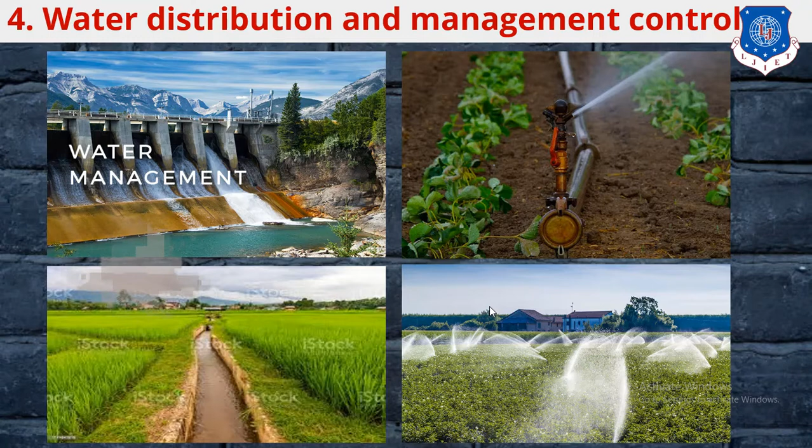Now, in this session, we have to discuss chapter number 4, that is water distribution and management and control. Okay, so in this chapter we have to discuss the content that is irrigation canal management. So that is the content that we have to study: irrigation canal management, then water distribution and management control.

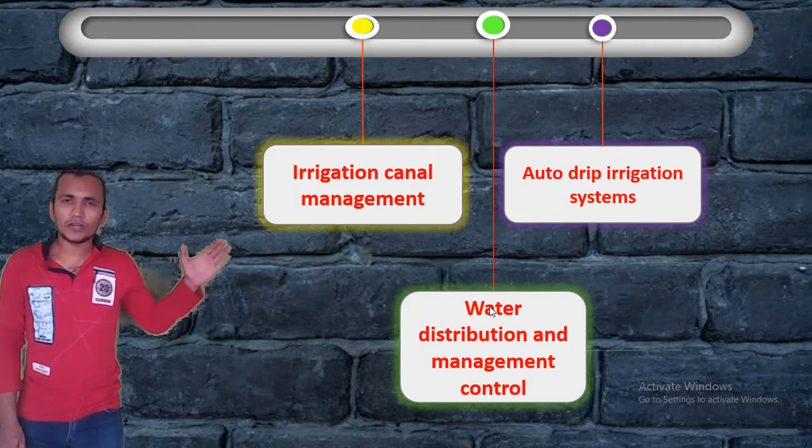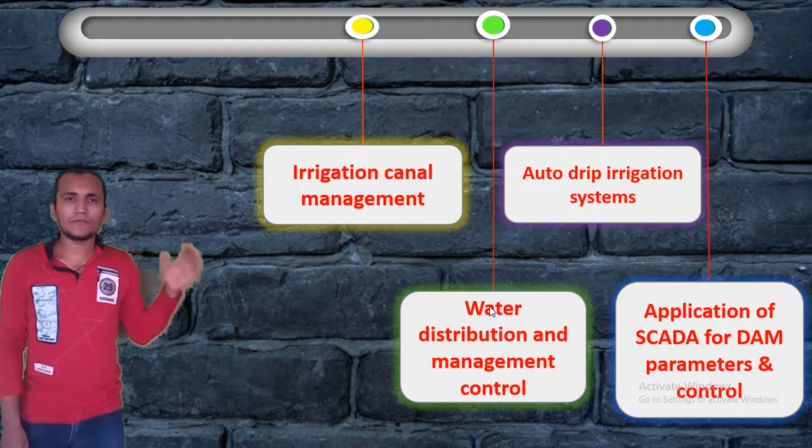Then we have to discuss the content that is auto drip irrigation system, and the last, that is application of SCADA for dam parameters and control. So that is the theory content that we have to study in this chapter. So let us start with the first topic of irrigation canal management.

So we know that the irrigation system means we have to supply the water to our crop or plant. So let us see the definition for irrigation system. The irrigation system is the system having a process of supplying the water to crop plants growing in the field by means of canal, reservoir, well, tube wells, etc.

So irrigation means we have to supply the water to the crop or plant. Then we can say that the water provides essential macro-nutrients to the crop, that is hydrogen and oxygen, that we already know is H2O. So that is the irrigation system. Then we can say that the irrigation system consists of the following.

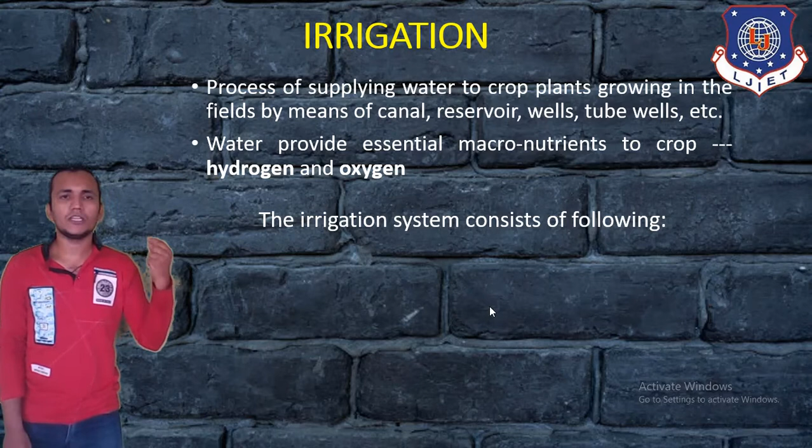Now we have to manage the irrigation system. That means we have to do water distribution management. So here we have to divide this irrigation system into different parts, and each part works as a management. So let us see the irrigation system having the following.

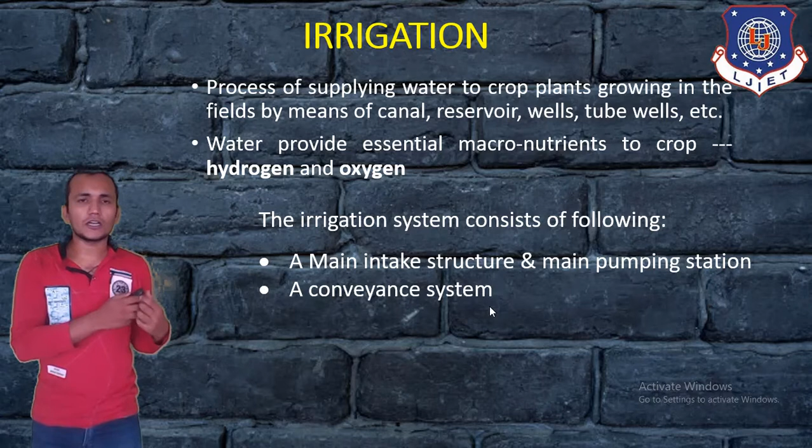First, that is a main intake structure and main pumping station. Then second, that is a conveyance system. That means we have to convey this water from the main tank to the distribution system. Then that is the distribution system. Then a field application system. A field application system means our crop or plant or our farm, that is a field where we require the water for irrigation purposes.

Then the last, that is a drainage system. So drainage means we have to drain the water, the excess of water that is not required by the plant or crop, that we have to drain back to our main intake structure. So those are the different parts of the irrigation system.

Here there are 5 different blocks. Okay, main intake structure and pumping station, then conveyance system, distribution system, field application system, and drainage system. So there are 5 blocks for the irrigation system. Now we have to discuss each block one by one.

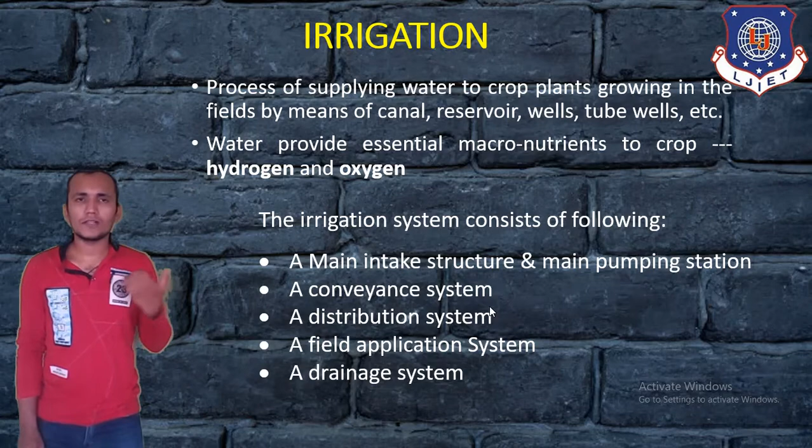Before we discuss this, first of all, you can see the picture of the irrigation system. So here you can see the main intake system. From this main intake system, that means a river or reservoir, we have to pump by using a motor or pump, like a centrifugal pump. By using the pumping station, it can be distributed or conveyed to the different conveying systems.

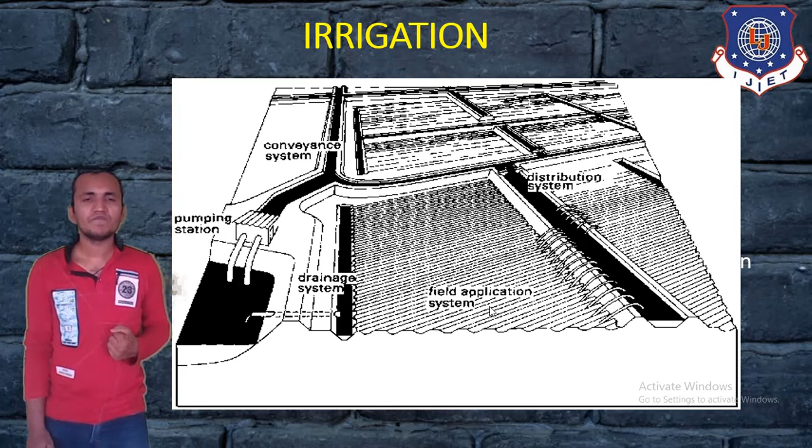Then by using this conveyance system, the water is distributed in different field application systems. So here you can see the field application system, and from the field application system, the remaining water, the excess of water, is drained back to our main intake system. Okay, so that is the main picture of the irrigation system that we will use to explain how irrigation management has been done. Now, the first block, that is the main intake structure.

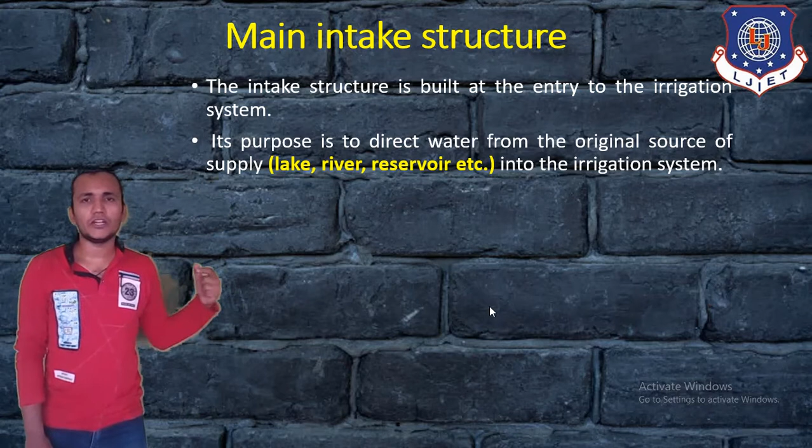So the main intake structure is built up at the entry to the irrigation system. Its purpose is to direct water from the original source of supply, like a lake, river, or reservoir, into the irrigation system. So that we already know. So if we see the picture for the main intake structure, then it looks like this.

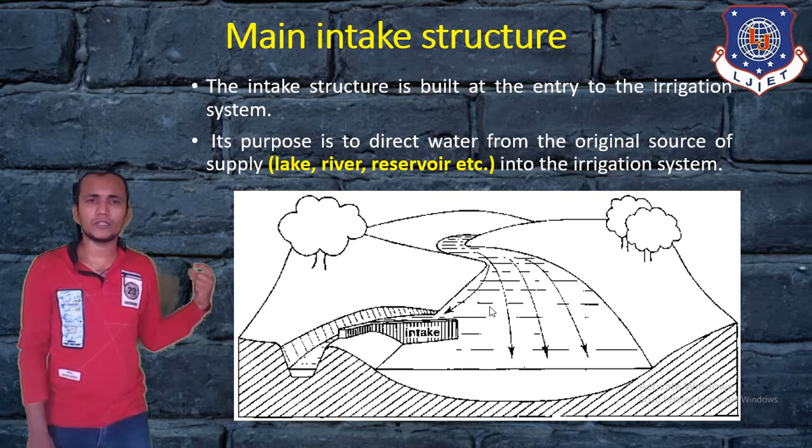You can see there is a river in a village. Okay, so from this river we can take water into a storage tank like a reservoir. Okay, so that is the main intake structure. Now the next, that is a pumping station.

Why is a pumping station required? In some cases the irrigation water source lies below the level of the irrigated field. Then a pump must be used to supply water to the irrigation system. We know that a pump or motor can supply water from a lower level to a higher level, so sometimes we can use a pumping station to supply water to different irrigation fields.

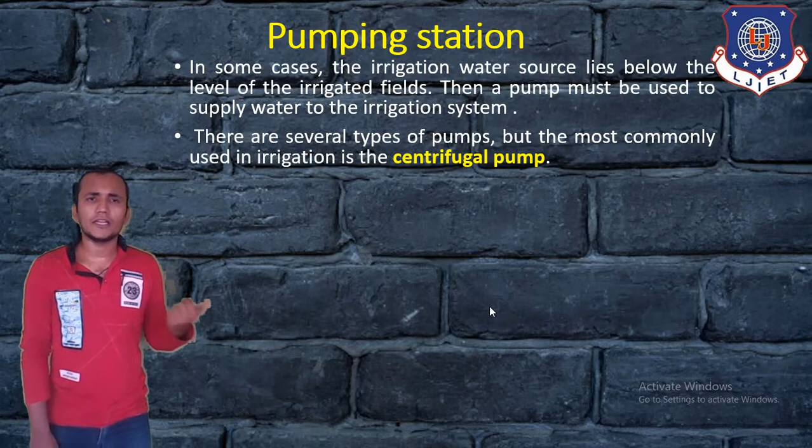There are several types of pumps, but the most commonly used in irrigation is the centrifugal pump.

Now let's see the picture for the pumping station. You can see one of the rivers in the village. Here, river water is collected using a pumping station and it will be distributed to the irrigation system. That is the picture for a pumping station.

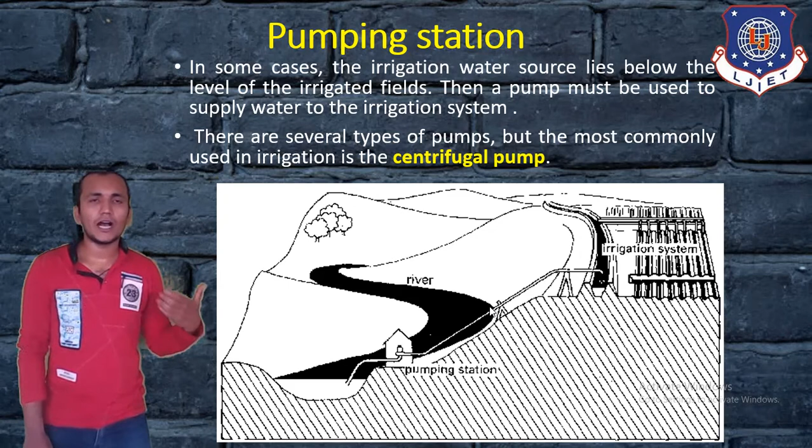We will try to explain this in a better way, so we can use different kinds of pictures to understand very well how it works.

Then there is the conveyance and distribution system. This is a main part of irrigation management, because we have to collect this water in a reservoir or river, then we have a pumping station. Now we have to distribute this water to different areas, different farms, or different field applications, so we have to manage it. That means we have to convey this water, distribute it, and also charge the farmers for the use of water.

That's why we also have measurement and control of water - how we can control the flow and measure the flow. That is a main important topic for irrigation management. So that is the conveyance and distribution system.

This system consists of canals transporting water through the irrigation system. Canal structures are required for control and measurement of water flow. In the conveyance and distribution system, we can use a canal system that we already know, to supply different farms or any irrigation field. We have to use a canal.

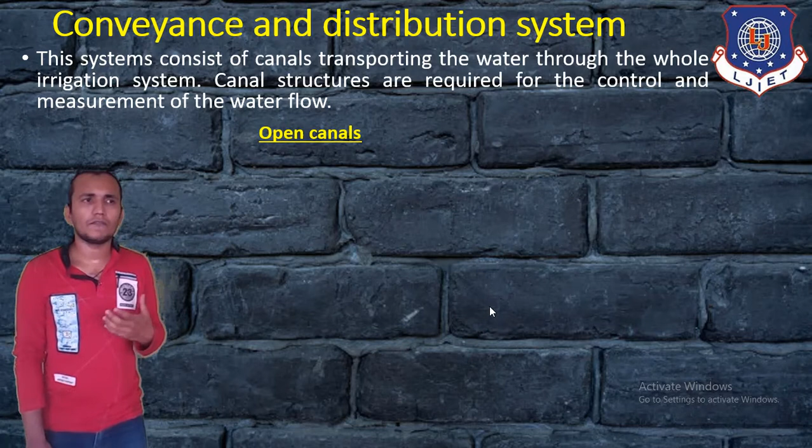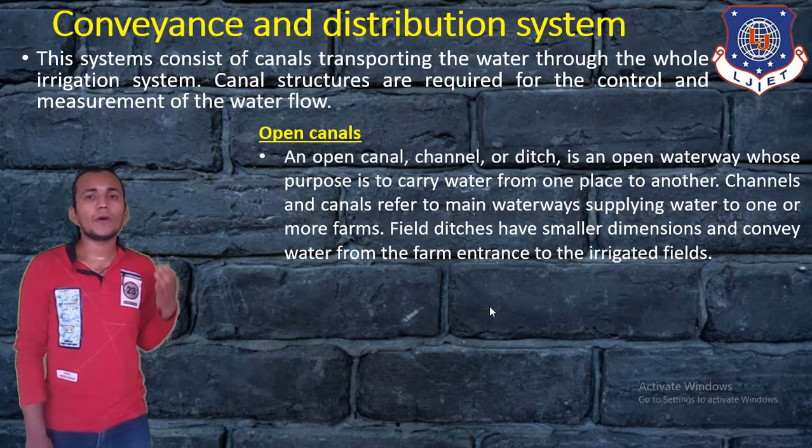First of all, there is the open canal, which we have already seen when visiting some farms. An open canal, also called a channel or ditch, is an open waterway whose purpose is to carry water from one place to another. Channels and canals refer to the main waterway supplying water to one or more farms, while field ditches have a smaller dimension and convey water from the farm entrance to the irrigated fields. So we can use open canals to supply water.

Canals have different characteristics depending on construction and design, so there are different design considerations. According to the shape of their cross section, canals can be called rectangular, triangular, trapezoidal, circular, parabolic, and lastly irregular or natural canals, which occur naturally. These are the different canal characteristics available as per the design or cross sectional area. That covers the conveyance and distribution system, and canal characteristics.

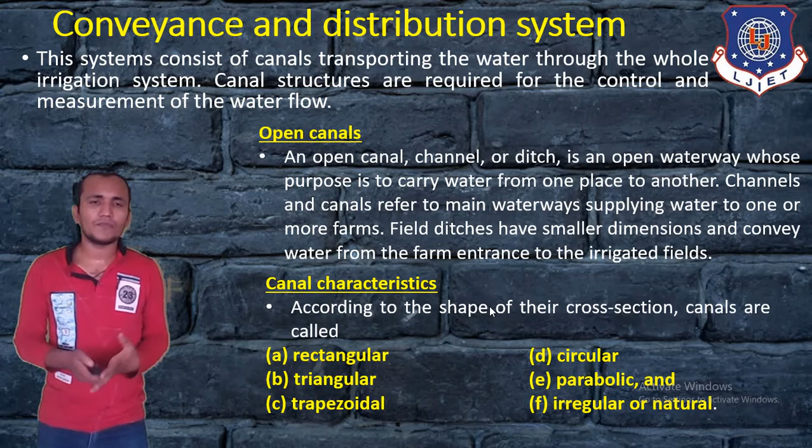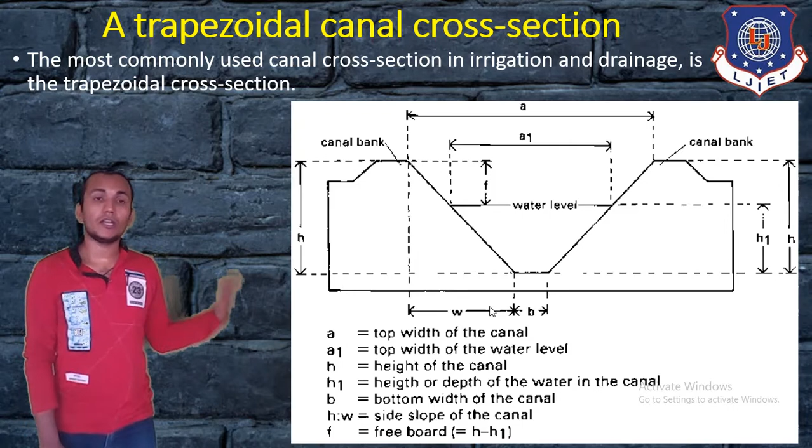Now we have to discuss the distribution control structure. In the conveyance system we discussed using canals. Now we have to distribute this water into the different irrigation field systems. So that is a distribution control structure.

Distribution control structures are required for easy and accurate water distribution within the irrigation system on the farm. We have to distribute this water as per requirement, so we can use distribution boxes.

Because once water is distributed to farm one, two and three, but if farm number 3 is not required at that time, we have to control this water flow by using division boxes. So that is one of the types used to control water flow.

Division boxes are used to divide or direct the flow of water between two or more canals or ditches. Water enters the box through the opening on one side and flows out through the opening on the other side. These openings are equipped with gates. So here are the related pictures for the distribution box.

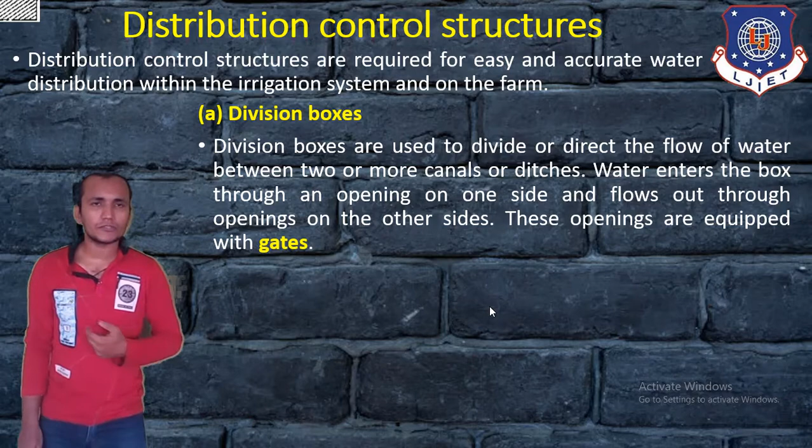Here water is distributed as required. First, the inlet water comes in, then two gates are opened using the distribution box while one gate is closed. In this way we can control the water flow to different irrigation fields. That is one type of control using division boxes.

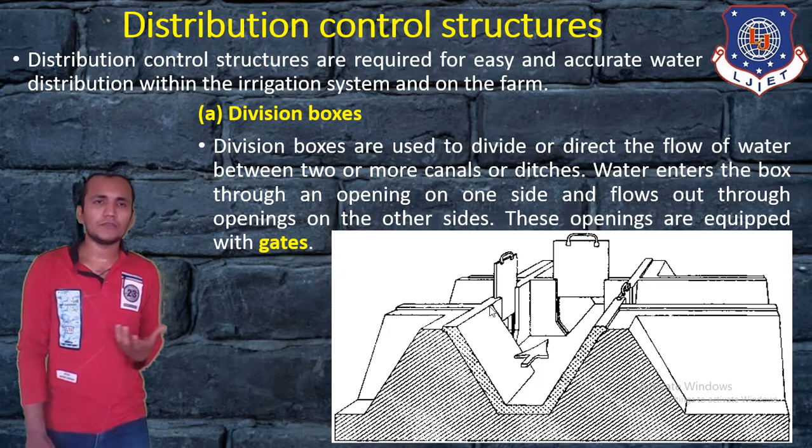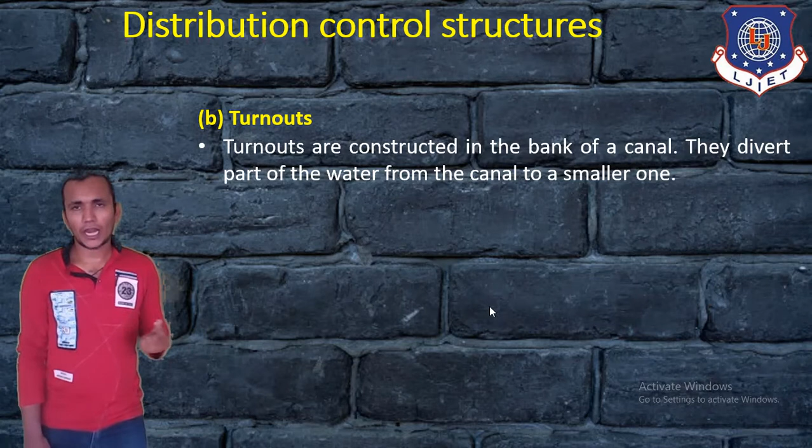Next, we can control this by using turnouts. Turnouts are constructed in the bank of the canal. They divert part of the water from the canal to a smaller one.

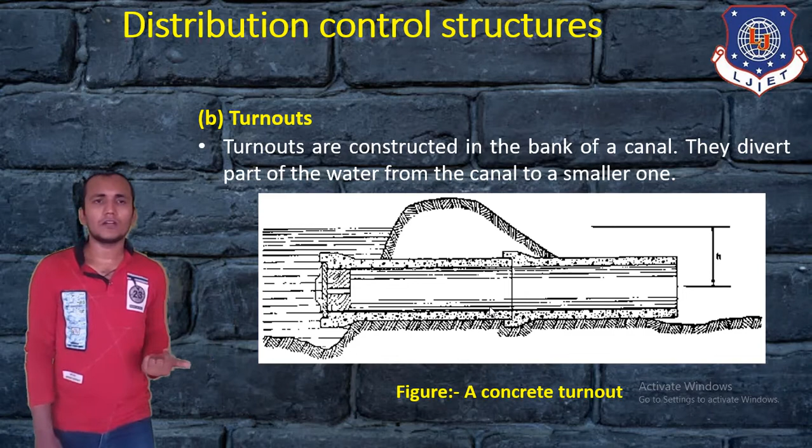If we see the picture for this, you can see a concrete turnout. This concrete canal can reduce the water flow and it will be turned out as per our requirement. They can divert the canal flow. So that is another way to control the water flow.

Then next is the check, used to control distribution. To divert water from the field ditch to the field, it is often necessary to raise the water level in the ditch. Checks are structures placed across the ditch to block water temporarily and raise the upstream water level.

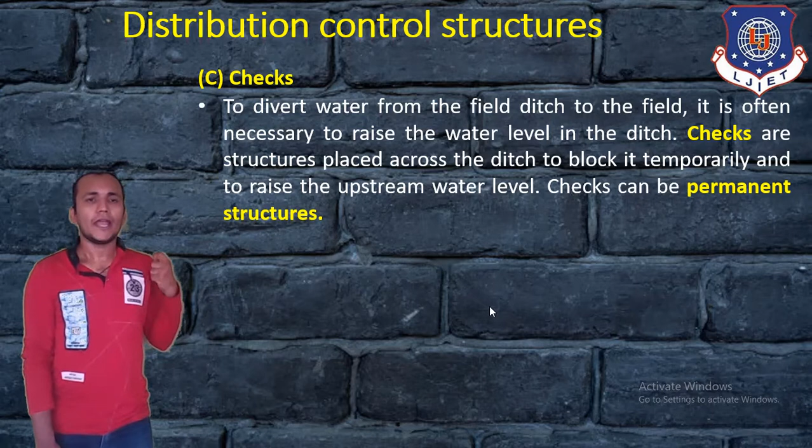Checks can be permanent structures. If we see the picture for checks, we have to block using this triangle type of check. That can block water for some time, meaning it raises the upstream water level.

Sometimes different types of checks are used that have a blank space at the bottom side. If the blank space is on the upper side, it can control the upstream water level, and if on the bottom side, it can control the downstream water level. So that is another distribution control structure, the check, used to control the water at the upstream level.

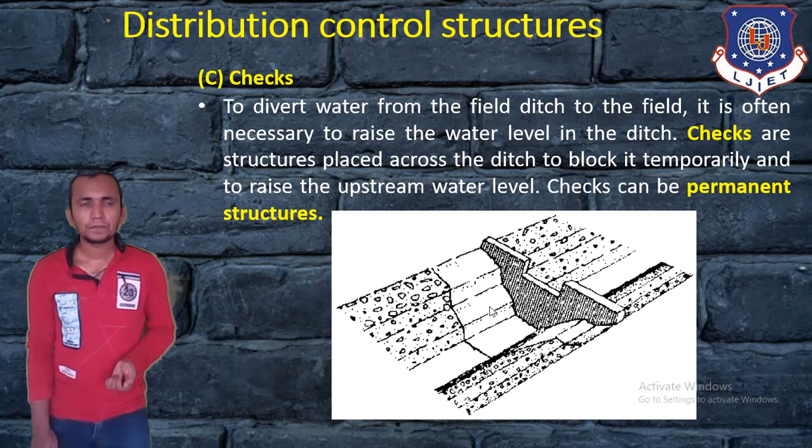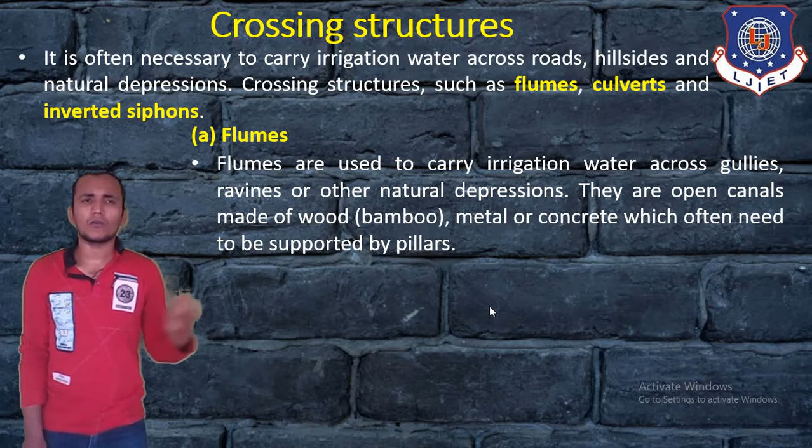Flumes are used to carry irrigation water across gullies, ravines or other natural depressions. They are open canals made of wood, bamboo, metal or concrete, which often need to be supported by pillars. So sometimes water can be controlled by using this kind of crossing structure.

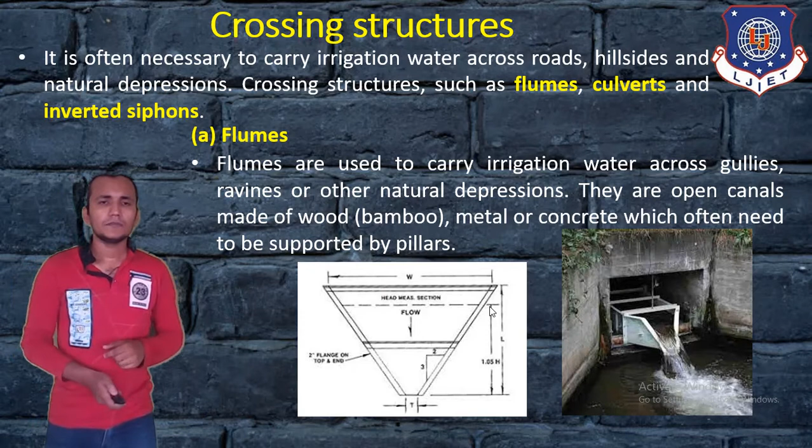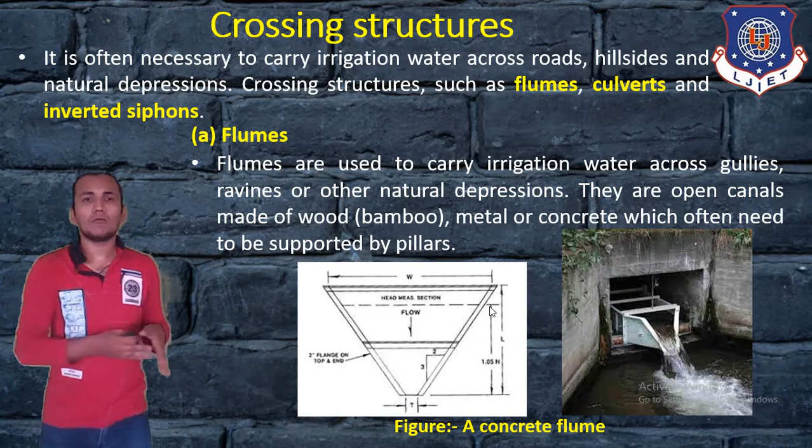Here you can see a concrete flume. That is a concrete flume, but it can also be made by metals or by bamboo woods. So that kind of crossing structure can be used for irrigation water if it is on the roadside or in mountains. If we have to divert it to supply at a better rate, and sometimes we have underground situations, then we can use this kind of crossing structure.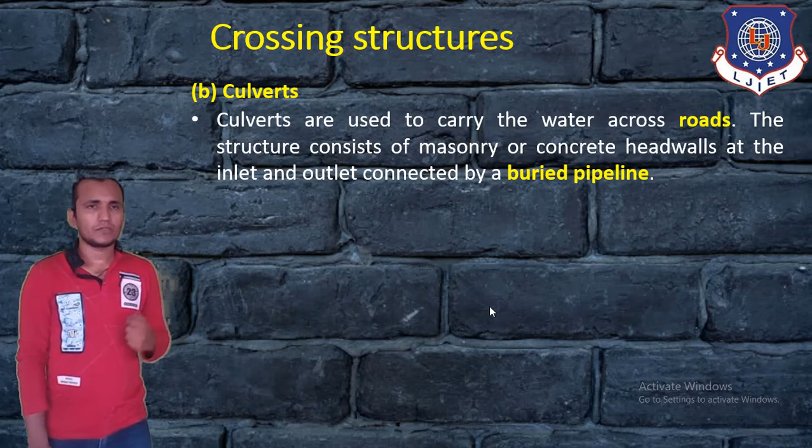Now another one, that is a culvert. Culverts are used to carry water across the road, and the structure consists of concrete headwalls at the inlet and outlet connected by buried pipelines. So culverts are like this, you can see.

So this kind of picture we already saw, that is some pipeline. By using some pipeline, water can flow in an underground station also. So that's why if a railway is going this way, then we have to use this kind of culvert system also.

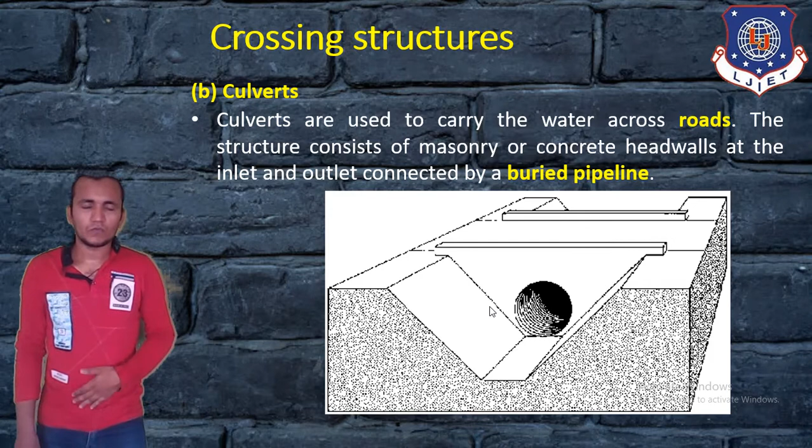Next, that is the inverted siphon. That is the most important crossing structure. When water has to be carried across a road which is at the same level as or below the canal bottom, an inverted siphon is used instead of a culvert.

This structure consists of an inlet and outlet connected by pipeline. Inverted siphons are also used to carry water across a wide depression. Sometimes when water flows in a very large area, big pillars can be used, and that is also called an inverted siphon.

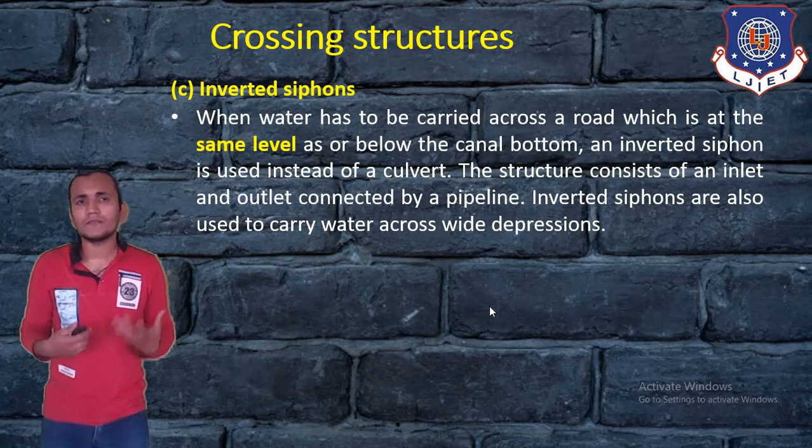Inverted siphons have different kinds of designs also. If some railway or other construction is available, then we have to divert it downward also. So that means inverted siphons can be used.

If we see the pictures for this, then you can see that is an inverted siphon. Here you can see inlet and outlet, two pipes, and also at the water road level the canal is going, so we can use a construction like an inverted siphon. That is the picture for inverted siphon, the most important crossing structure in this topic.

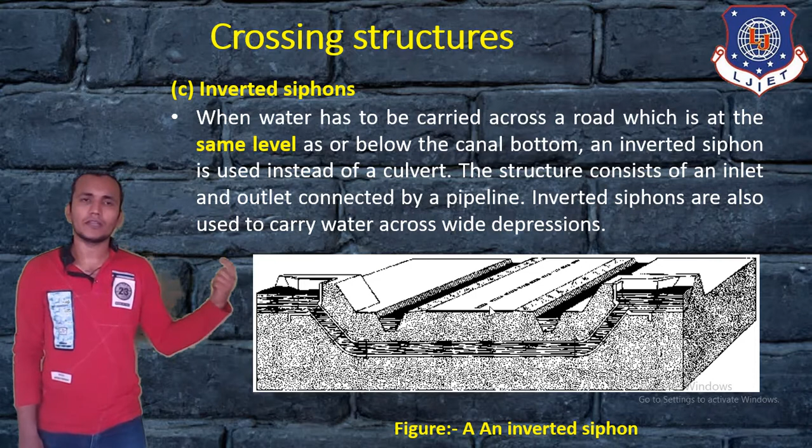Then water measurement. We have to measure our water level, because in the irrigation scheme where water costs are charged to the farmer, water measurement provides the basis for estimating water charges. That's why water measurement structures are most important.

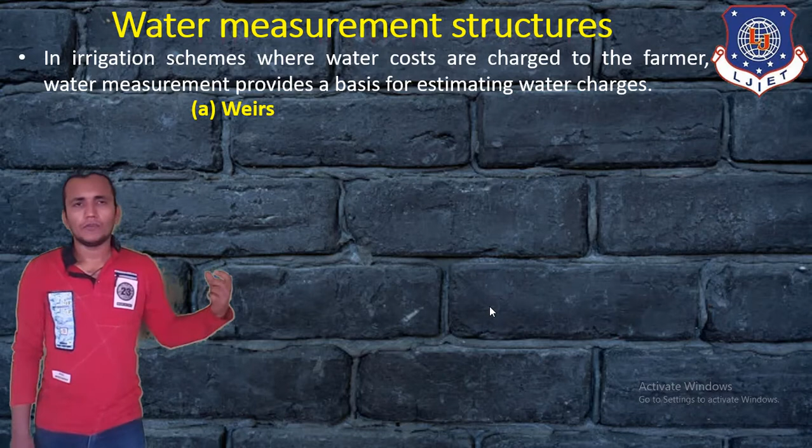If we have to measure this water, then different techniques will be used. First, that is weirs. Weirs, in their simplest form, consist of a wall of timber, metal or concrete, with an opening of fixed dimension cut into its edge. The opening, called a notch, may be rectangular, trapezoidal or triangular.

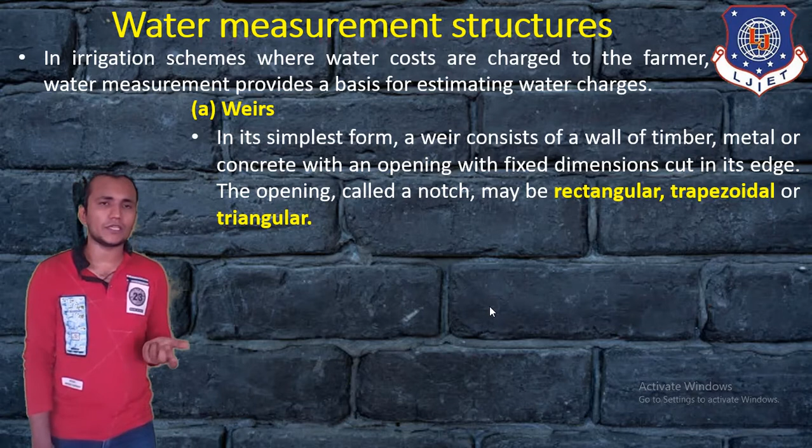This figure is like this, you can see that is a rectangular weir. Here we can connect flow meters that measure the flow, or level sensors that measure the water level and flow. So here we can use a rectangular notch, and that can measure using rectangular weirs.

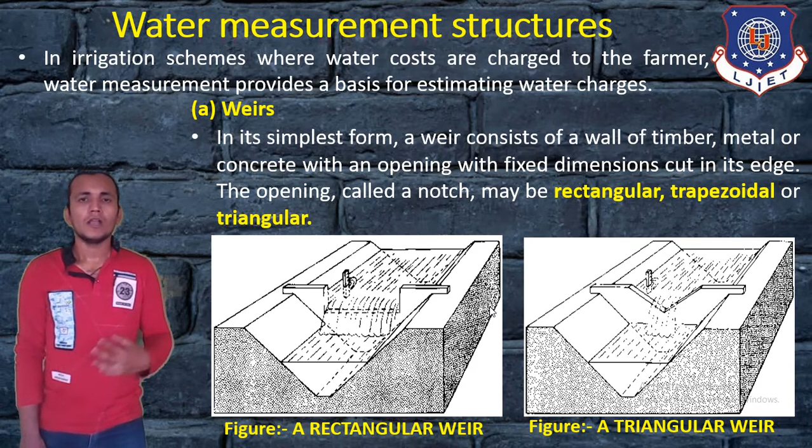Then here we can use a triangular weir. So that kind of different technique can be used to measure the water level, and trapezoidal is also used for this.

Then water measurement by Parshall flumes consists of a metal or concrete channel structure which has three main sections: a converging section at the upstream, then a constricted or throat section, and lastly a diverging section at the downstream end.

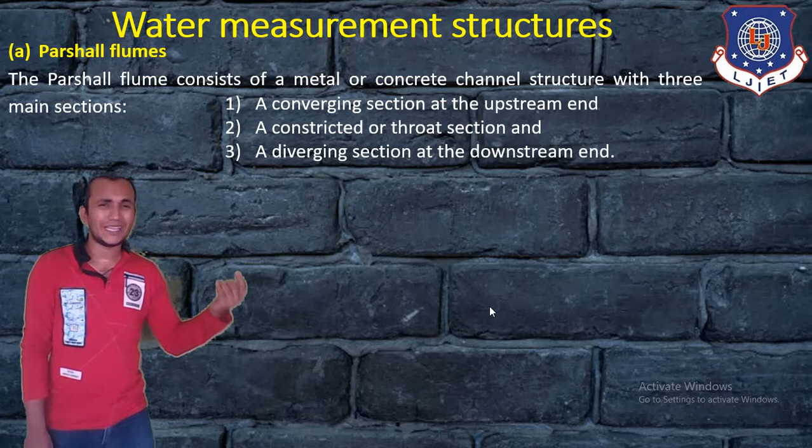So here these three structures will be used. First is the inlet, then second is the measuring section, and third is the diverging section at the downstream end. If you see the picture for this, you can see here first, that is the converging section at the upstream.

We can enter the water inside. Then at the throat section we have a measuring scale, so water will be measured. Then the diverging section, that means the downstream end. So that is another method of water measurement.

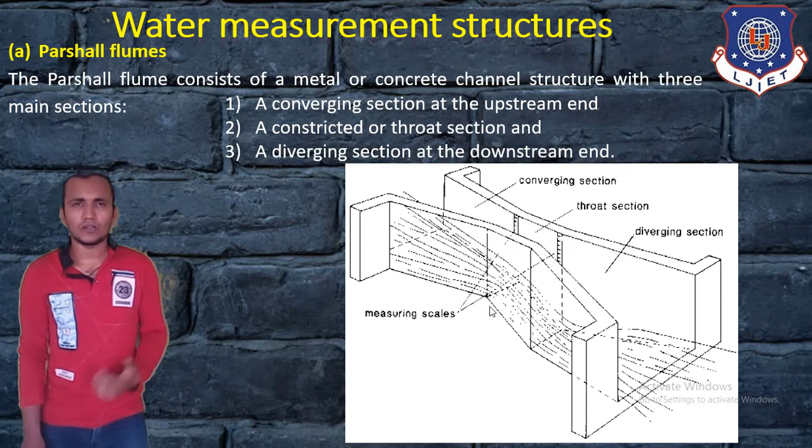Then the field application system. So here in the field application, that means our farm or our areas or our crop or plant. So we have water available at the field application system. So now we have to distribute, or we have to give water to our crop or plant. So that is our field application.

So there are different kinds of techniques for supplying water to our crop. That is surface irrigation, then sprinkler irrigation, then drip irrigation. So those are the different irrigation systems that can be used here in the field application system. Now first, that is surface irrigation. So here you can see surface irrigation is an application of water to the field at ground level.

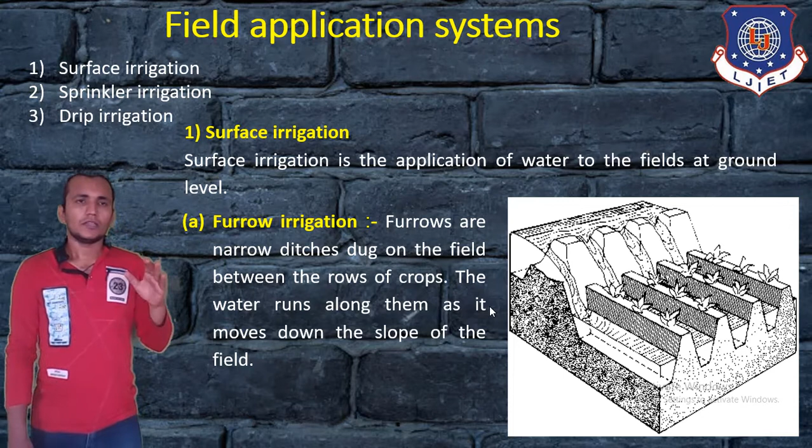Here are the rows of crop. Okay, in this row we have used a ditch. Okay, and the water runs along them as it moves down the slope of the field. So that means water will be supplied by using a furrow irrigation system. So a furrow irrigation system is a type of surface irrigation system. Okay, the main type, that is the surface irrigation system.

Now in the furrow irrigation system we also have another way to supply water, that is by using small pipes. So in this figure you can see here small pipes are connected. Okay, that is called a spile, or small pipe buried in the ditch bank. So that can supply water to this row of the crop.

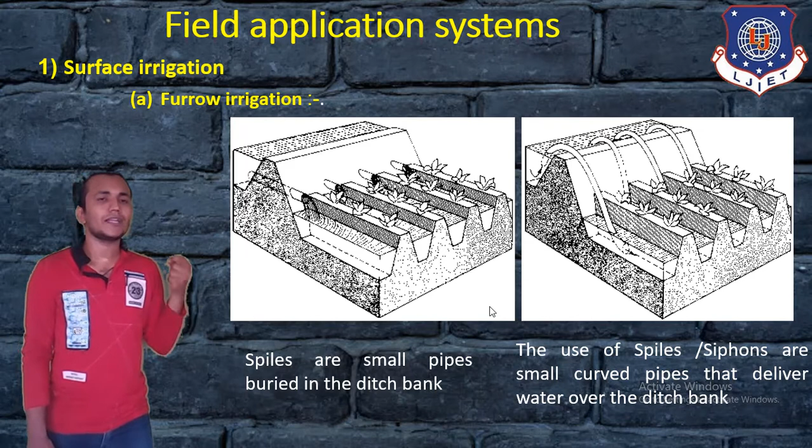Then another way to supply this water is by flexible pipes. So here we can use spiles or siphons, which are small curved pipes that deliver water over the ditch bank. So that is another way to supply water to our crop. So that is a type of furrow irrigation, and furrow irrigation is a type of surface irrigation.

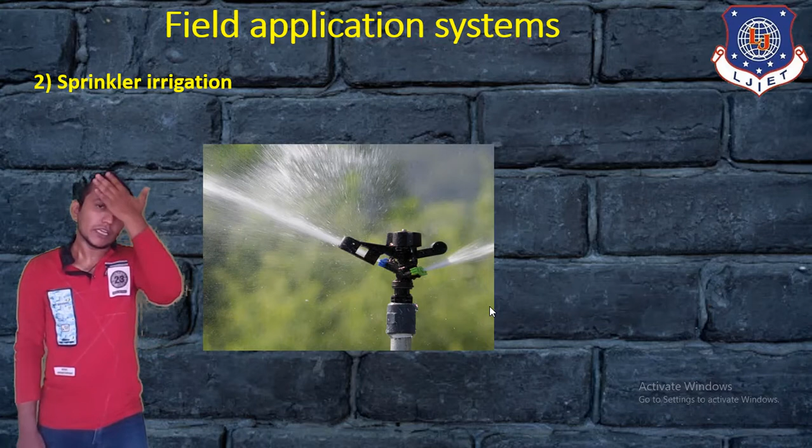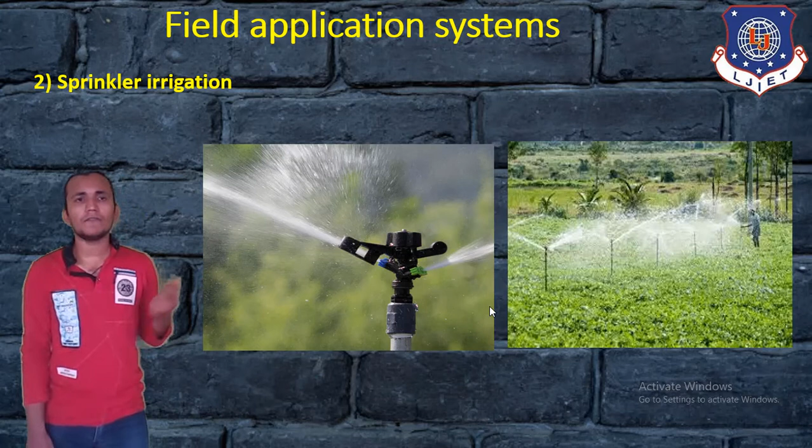Now in the field application system, next is the sprinkler irrigation system. So in the sprinkler irrigation system we already know that we use a sprinkler. So here we can supply water to our crop by using an automated system. Okay, and this also saves water, because in the traditional system some water will be wasted, but here we can control the water or we can save the water.

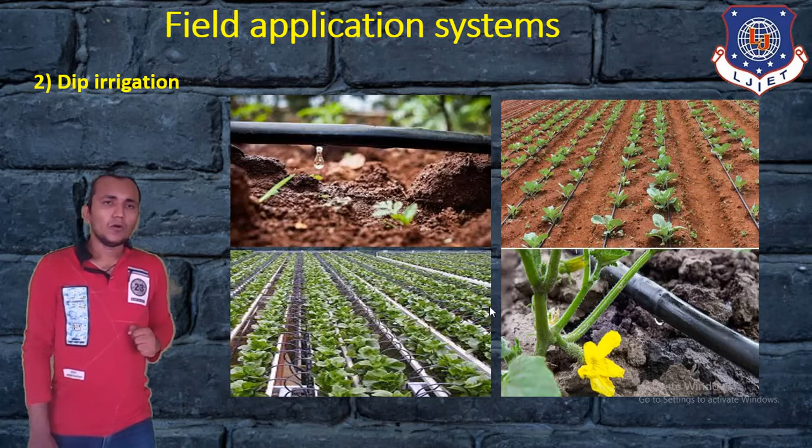Now we know that there are different types of irrigation systems. So soil-based irrigation: as per the soil, we know that crops grown in sandy soil require more frequent irrigation than crops grown in clay soil. Means clay soil requires less irrigation, but sandy soil requires more irrigation. That is a soil-based irrigation system.

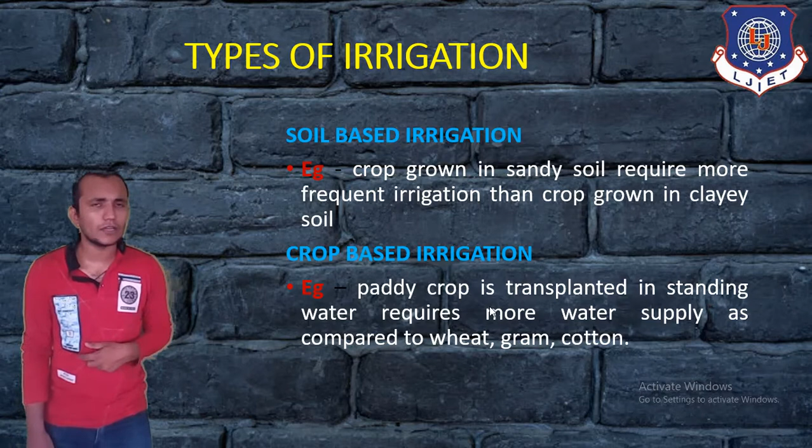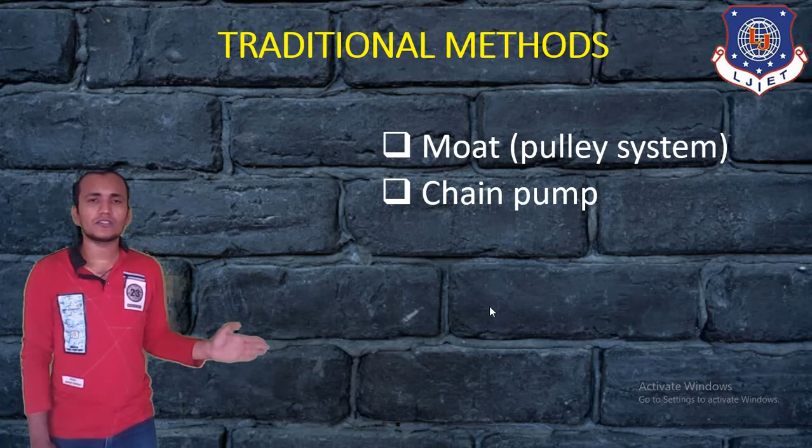And another way, we can say crop-based irrigation. So paddy crop requires more water supply than wheat, gram, cotton. So as per crop requirement, we use different kinds of irrigation systems. Now we know that in the traditional method we can use a moat or pulley system, then chain pump system, then dhekli system, then rahat or lever system.

Those are the old systems that can be used for irrigation. So let us see this. First of all, that is a moat system. So in this picture you can see it is manually giving water to our crop or plant. So that is time consuming, and water is wasted in this system.

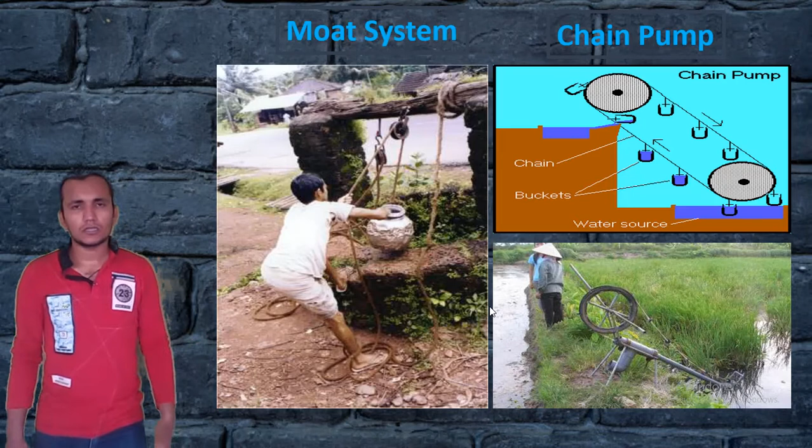Then the chain pump system. So here you can see, by using a manual chain pump, by using a chain roller, buckets of water can be filled and collected on the upward side. So that is another old traditional system. That is another picture, same as the chain pump. Okay, that is an old system that can be replaced with a modern system. But we have seen how water irrigation was available in the past.

So now we have to make an auto drip irrigation. How can we make our system automatic? That's why we require a general block diagram of the auto drip irrigation system. We can use an Arduino board here, or we can also use a microcontroller. Here we use signal conditioning: temperature sensor, humidity sensor, soil moisture sensor, pH sensor, and then a keyboard. Then you can see an LCD display for displaying which parameter is measured.

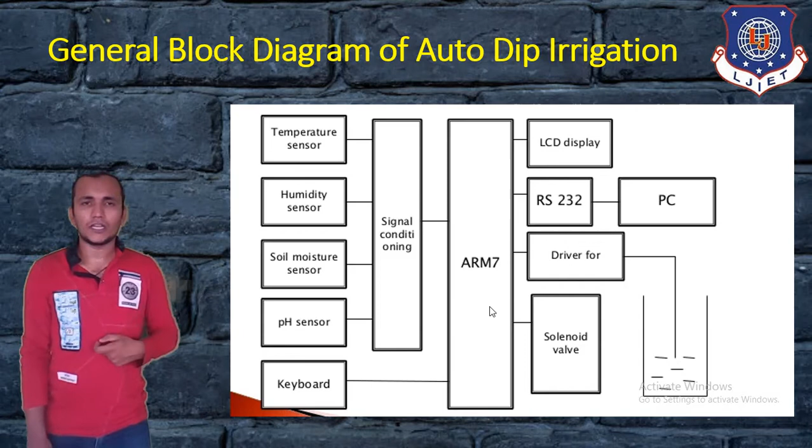Then an RS232 communication channel can be connected to the PCs, and this Arduino is a driver to the water storage. And here a solenoid valve is also used to connect this to our different farms. So that is the auto drip irrigation system that can be used.

Then the basic structure of the irrigation control system: first, the irrigation controller, that means a programmable device, analog interface, then analog to digital converter and communication line. Then different kinds of water content determination are also required, like soil sensing, plant sensing, water balance. Then water supply by using filters, pressures and water meter.

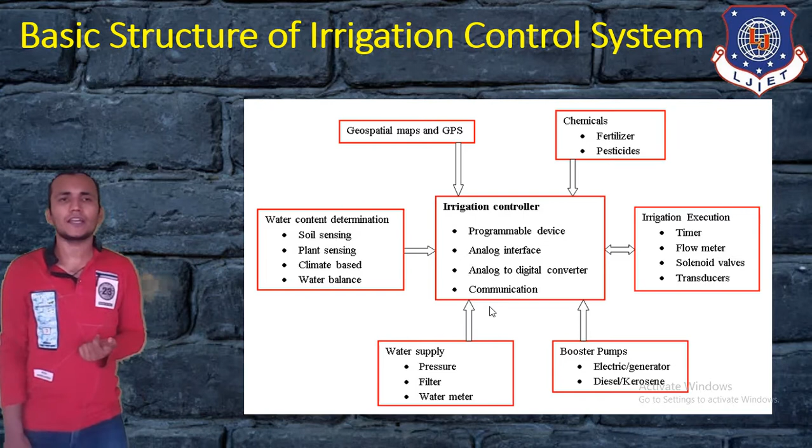Then pumps powered by an electric generator or by diesel or kerosene. Then irrigation execution by timers, flow meter, solenoid valve, transducer, chemical use, fertilizer. So those are the different parts required for an irrigation control system.

So now if we have to make an automated irrigation system, that is a picture for it. In this picture you can see there are 8 farms, and in every farm a solenoid valve is given on the black line, and yellow is the irrigation pump from the main intake system. Every farm has sensors connected to the interfacing unit, measuring temperature, moisture, water available. This automation communicates with our PCs.

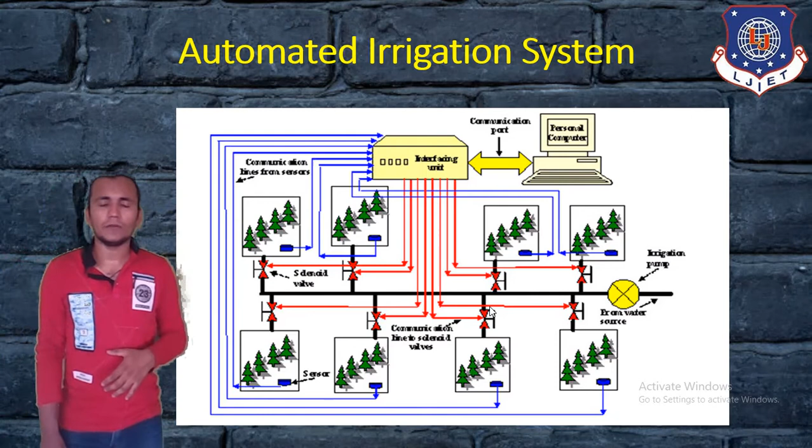So that is a fully automated irrigation system. If we have to make an automated irrigation system, then we have to design it like this. And you can also see the solenoid valve lines are directly connected to the interfacing unit. So that is a simple automated irrigation system. In this session we have discussed only this, and the next few topics we will discuss in our next session.